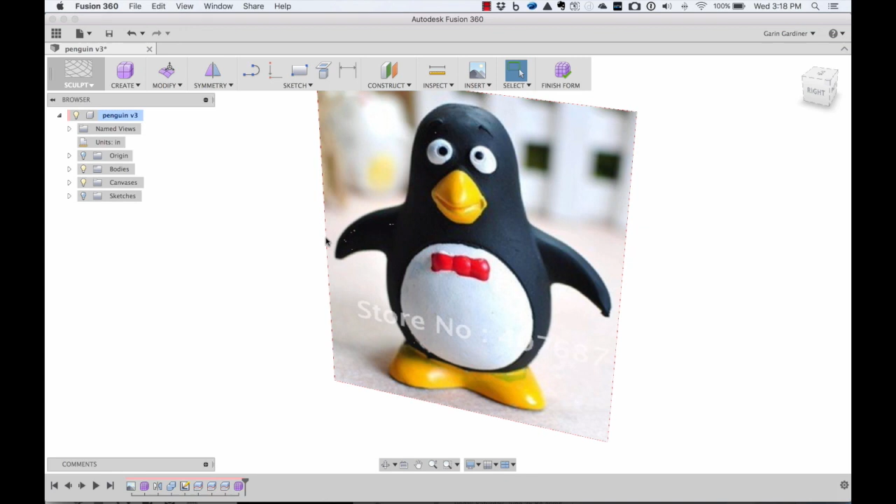So with that, let's turn those off and we'll turn that canvas back on. I just put a canvas in the background. And then our Sculpt environment is a great environment for this kind of stuff.

So I can create a box, and I'm just going to place a box down here kind of at the center, and we'll drag that up. With that, I'll just kind of eyeball a little bit about as high as I want it to be to start with. And I can also come in and put symmetry, so if I want it to have symmetry along some of these axes, I can do that.

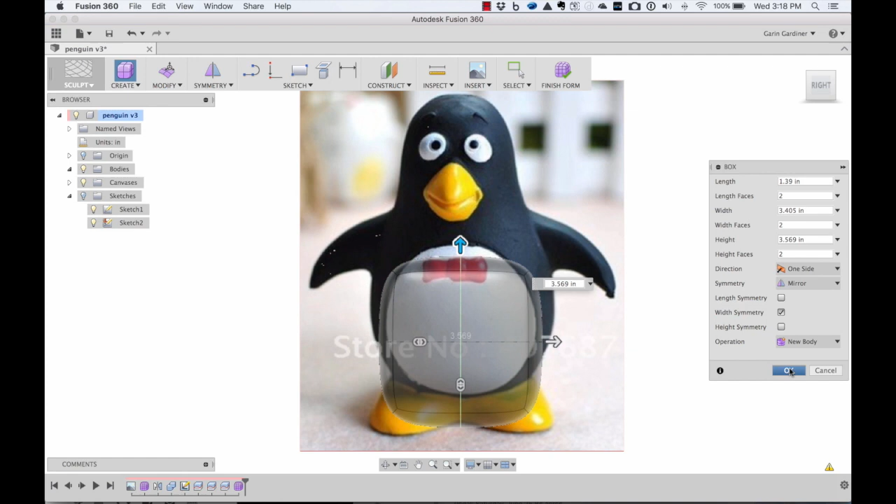Let's make sure that is fine. We'll just accept that so we can see I have the box there. If I turn off the canvas, we'll be able to see it solid, but the canvas just has the ability to kind of burn through my model a little bit.

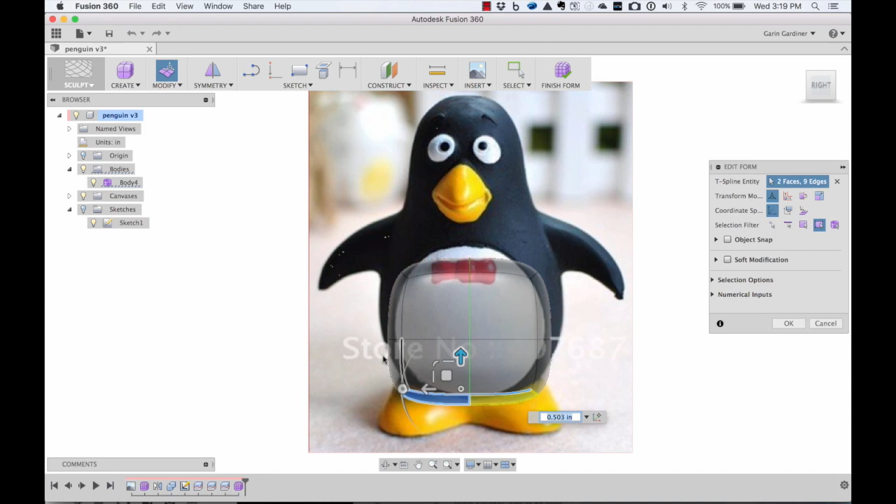So I'm going to grab that, and with my editing command, I can just come in here, pull that up a little bit. Maybe we'll pull that center up a little, pull those edges up a little bit. And I can start kind of scaling this in and out. So with that, we may say let's pull that in a little bit, maybe bulge that out a little, so we get something like that shape.

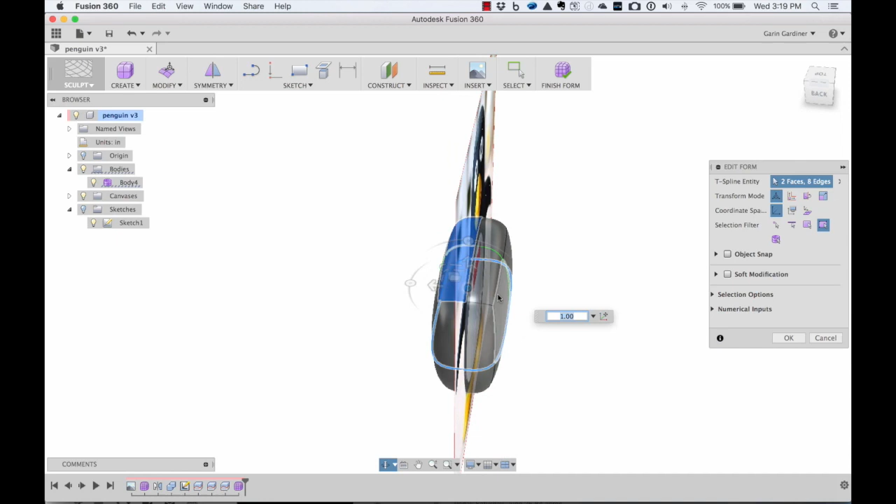We'll grab each of these faces, and you want to grab all four of them so that they don't split into individual faces when you extrude it up. Holding your Alt key, you can drag up and extrude and get extra faces.

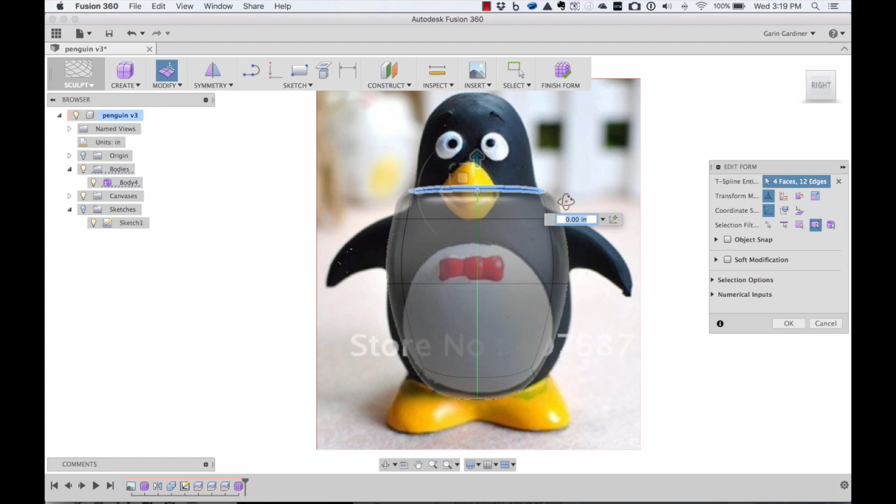So that'll be helpful so I can get those fins kind of in the place that I want them to be. We can probably pull that up a little bit. And with those selected, let's extrude those up one more time, and we'll bring those up.

Let me undo that just for a minute, make sure I just have faces and not edges, and pull that up. There we go. We'll go to the front view, scale that all the way down, kind of move it up. So you can see here pretty quickly we can grab shapes like this and kind of follow the contour of what I'm looking for.

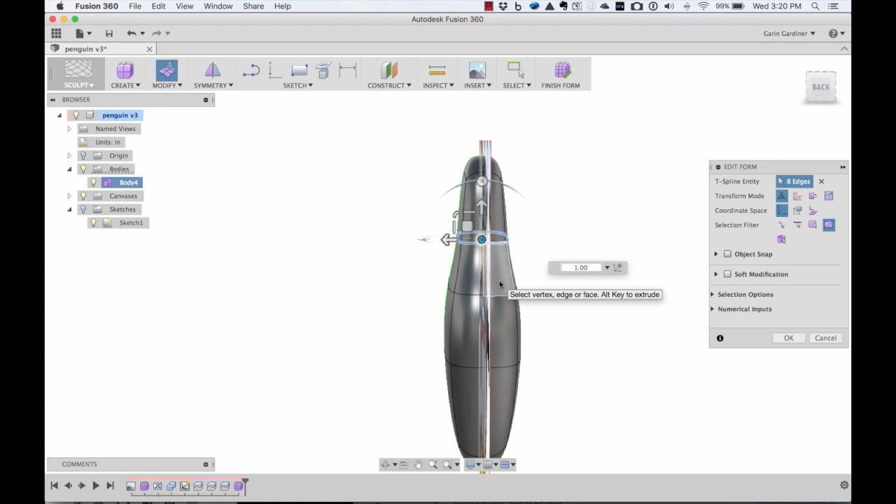It may be we want this to be a little bit fatter, so I'm going to grab the whole thing and just kind of scale out the whole shape. And the back of it maybe a little flatter than the front. We may want to put a tail in here.

I'm not going to worry too much about that yet. But I can grab all of these and just do a scale in if I want. It'll kind of flatten it a little bit. So we have kind of the shape that we're looking for there.

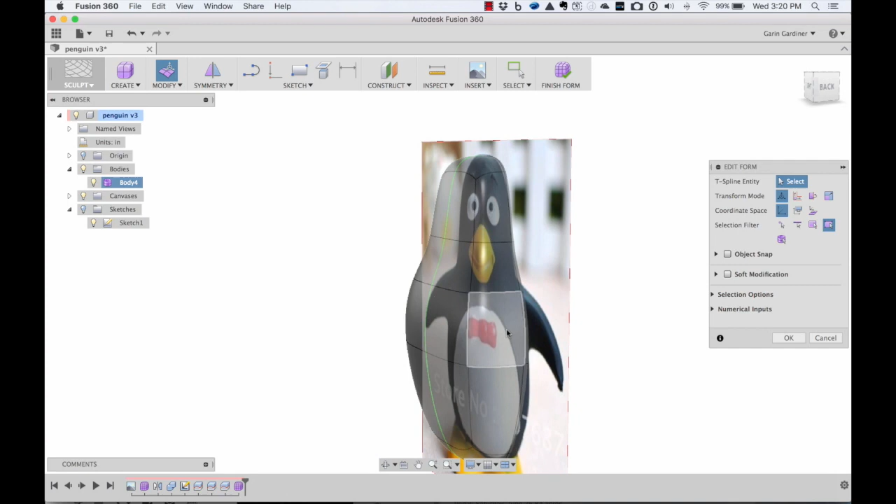We may even want to, let's just grab that back face, and looking at the side here, I'm going to drag that out. So we'll do an extrude. Now I didn't have an exact, I wanted the fins to be out a little bit.

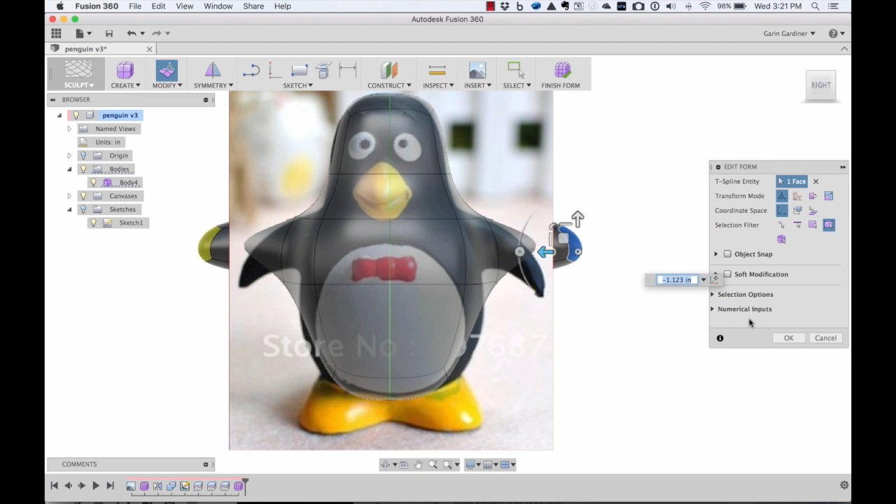There we go. So let's turn off the canvas now. So I have something like that. And let's pull that maybe in a little bit more, and we'll extrude it a couple of times. So we have that face, and I'm just going to hold the Alt key once again and drag that out just a few times. There we go.

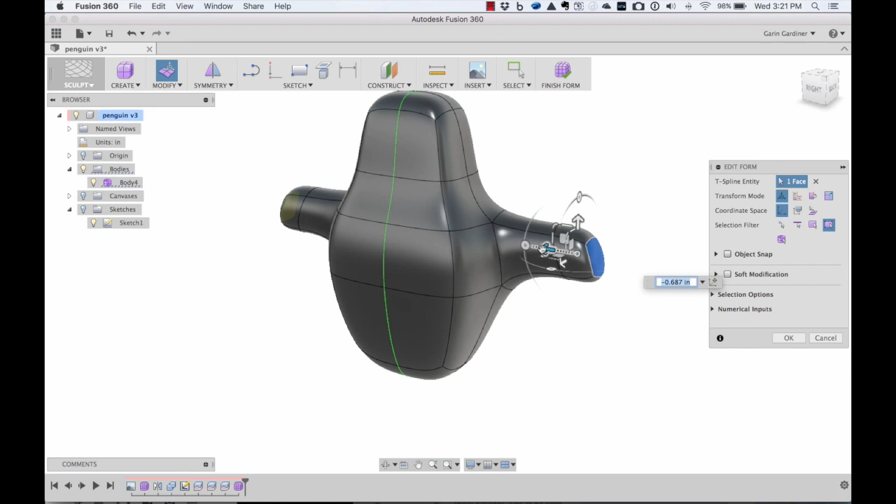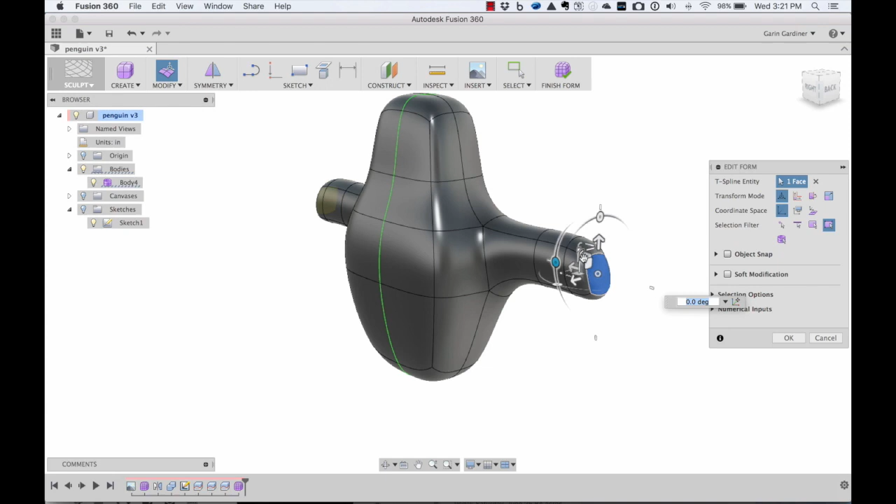Maybe three times. And then that allows me to kind of follow a contour, see how I want that to look. Maybe we rotate that a little bit, move it up. This one, we'll just double click on that edge. We may move it up, rotate it around a little bit. This end one, we may just want to scale that in, be a little bit flatter, and pull it down.

And maybe out a little bit, so you can just play around, kind of figure out what shape you want this thing to have. It may be that we want that to come in something like that a little bit. So we have the basic shape of our penguin.

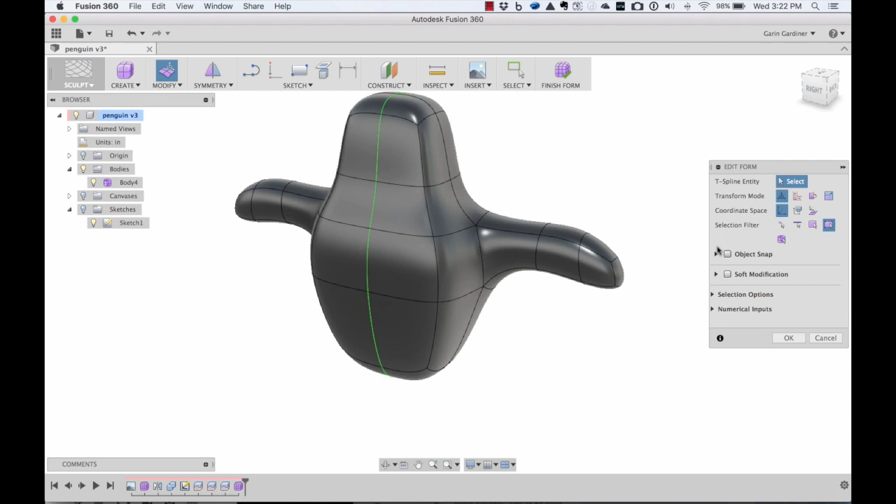From here, if I return out, it's now a solid body. I can do a number of things with it, like go back into the sculpt environment. If I wanted a foot here, I may just want to drag out something like that as a foot, pull it up a little bit, and let's just hit OK.

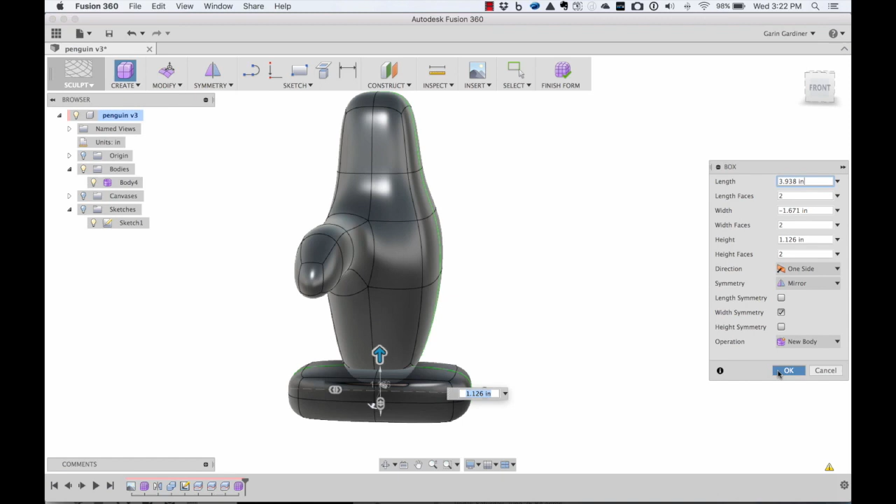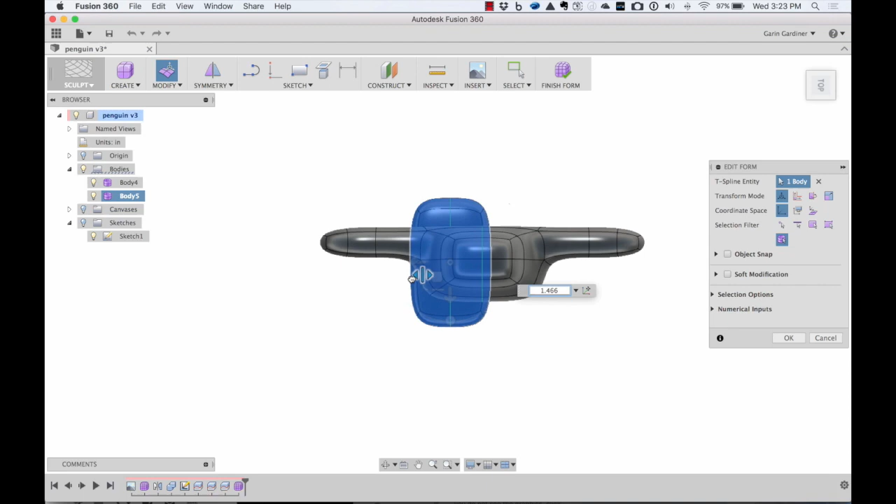To make something like a foot here, I want all these edges to be sharp. So I can just select them all, right click, and hit that we want to crease those, so we have a nice flat edge. And we may go to the front of that, grab the whole thing, and maybe we want it to be a little fatter, maybe a little narrower, so we'll scale it in a little bit.

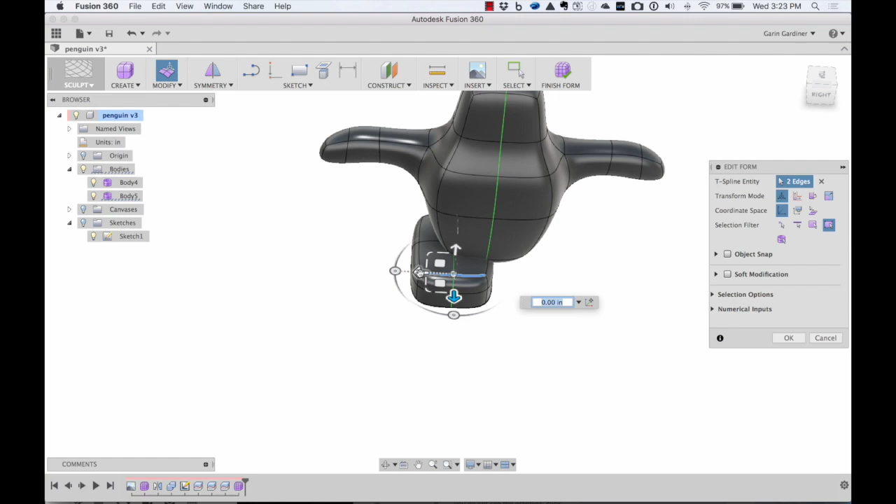It may be that if we go to just let's grab, you can see here we can choose. Right now it's looking at body. We can have all control, so I can grab everything, and we may want to scale that in a little bit there.

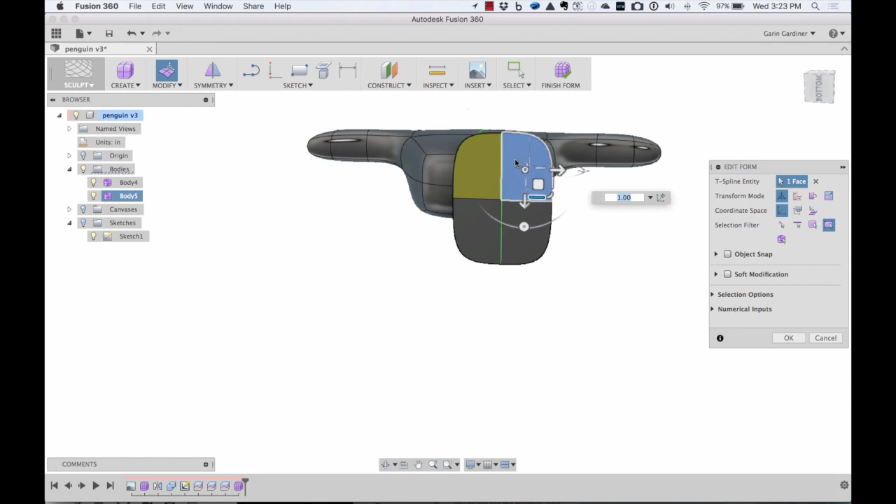I'm just going to undo that and grab all those edges all the way around. We'll scale those in just a little bit so it gives us some contour on here. And then we may want the entire foot to be kind of narrower, so we'll just scale that in.

We may want the back to be wider than the front, so we could grab those faces, kind of scale those out. We're just kind of playing around with this, seeing something we want. That looks pretty blocky. It may be that we want those to be a little narrower.

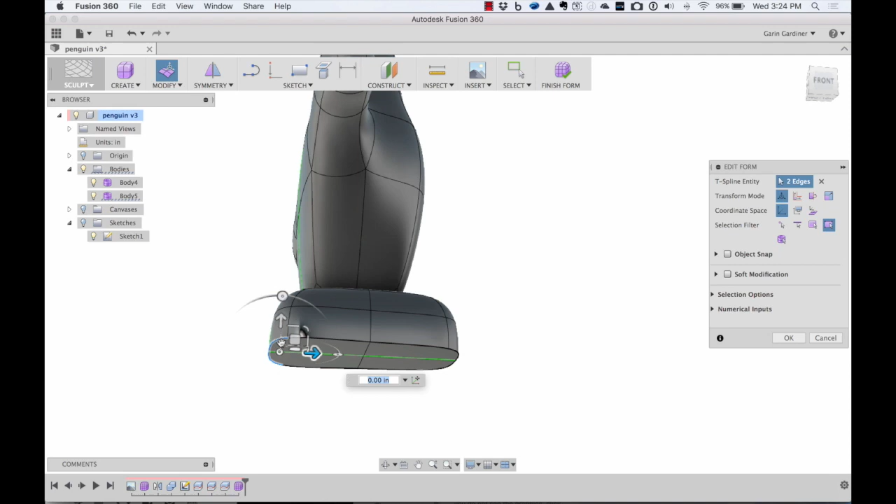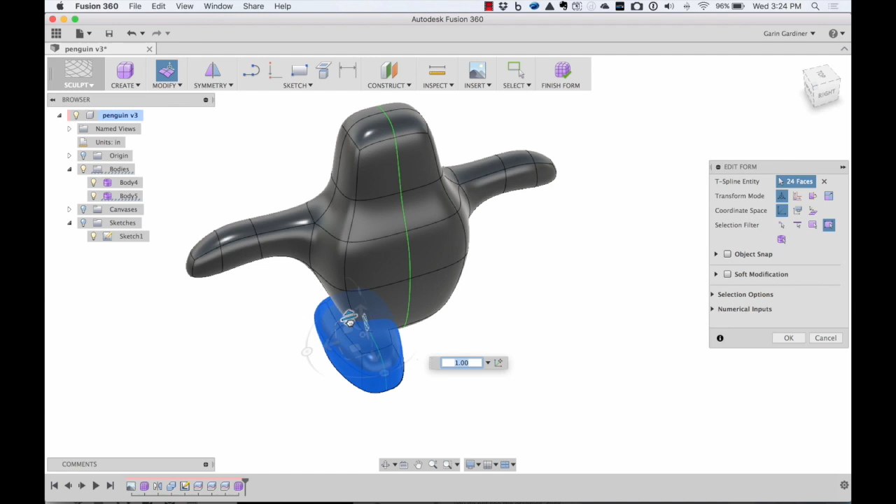And this to be a little fatter, so you can kind of control what that might look like. As you come in and play around a little bit and figure out the shape that you want, maybe the whole thing needs to be a bit flatter, maybe it's too fat, so you get something like that. And so we'll use that as one of the feet.

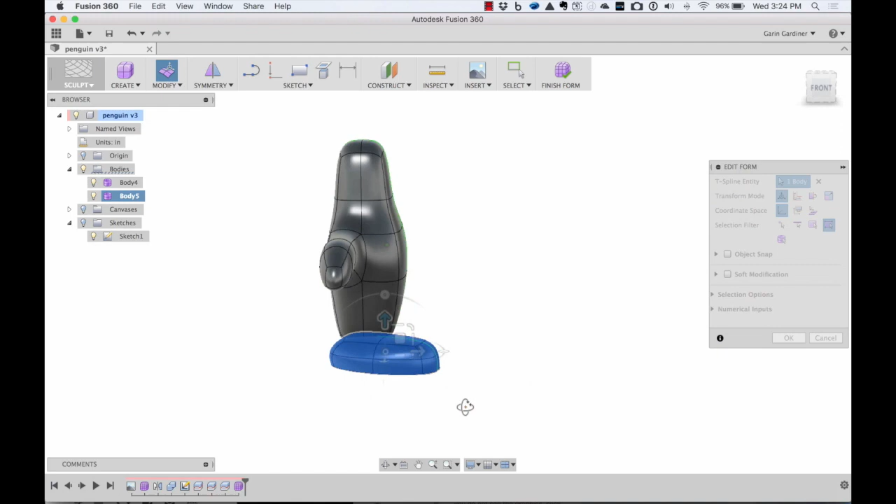I'm going to position it where we want it, so we'll just grab the whole thing and rotate it a little bit so we get something like that. And in the front, we want to pull it up into the model a ways. We'll see what that will look like in a minute. Not quite, it looks a little big.

We probably want to scale the entire thing down, so we can just go to the center, scale the whole thing down. I want it to be a little exaggerated, but not too exaggerated. So with something like that, when I return out, you'll notice that I have a couple of different bodies for that.

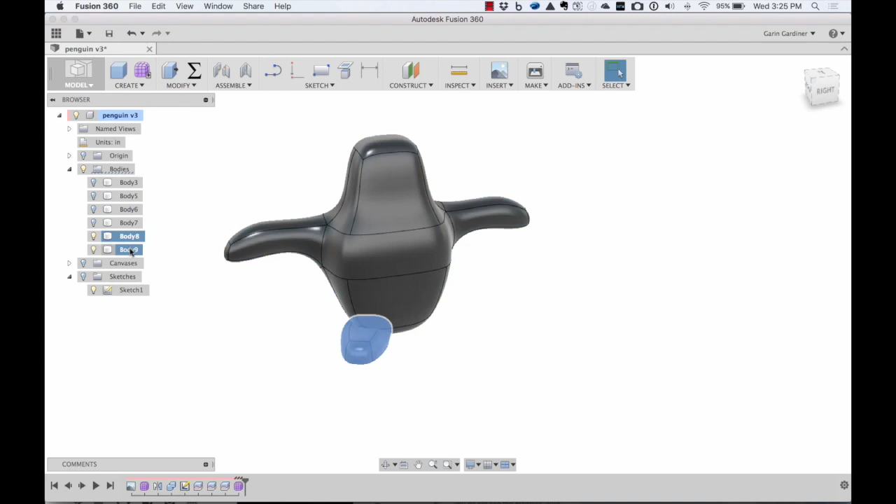And I can also come in and say, let's just mirror. And I can tell it to mirror that body. And I probably don't have a plane where I want, but let's see if that's in the middle. Looks like it's pretty close. So I've mirrored that over, and now I have both sides.

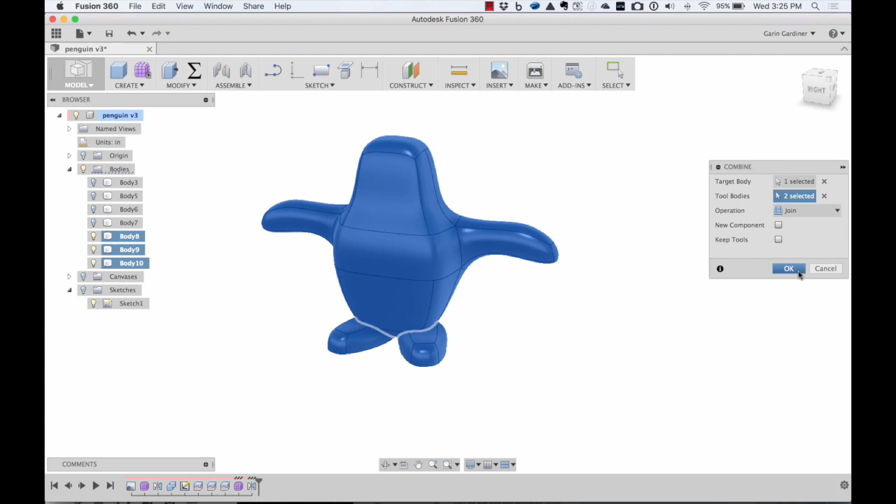And then what I did to join all these together, because ideally I'd do much the same on the beak, I would come in and say let's combine these three parts. So now it's one body for all of it.

So now when I export this, which I'm going to want to export as an STL file, I can come in and say let's just do an export. I can just right click on that body, save it as an STL. I don't want to send it to a printer, so if I hit OK here, it's going to ask me where I want to save it. So I can give it a name, save it to my desktop or wherever, and save it as an STL.

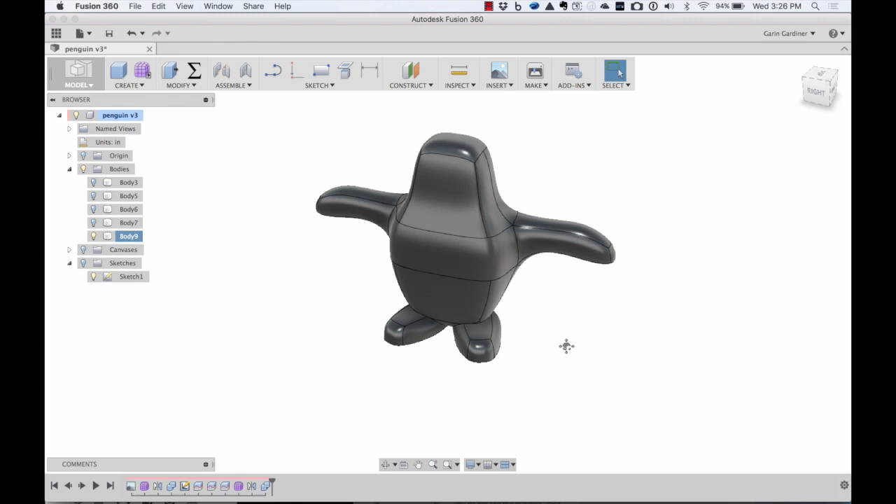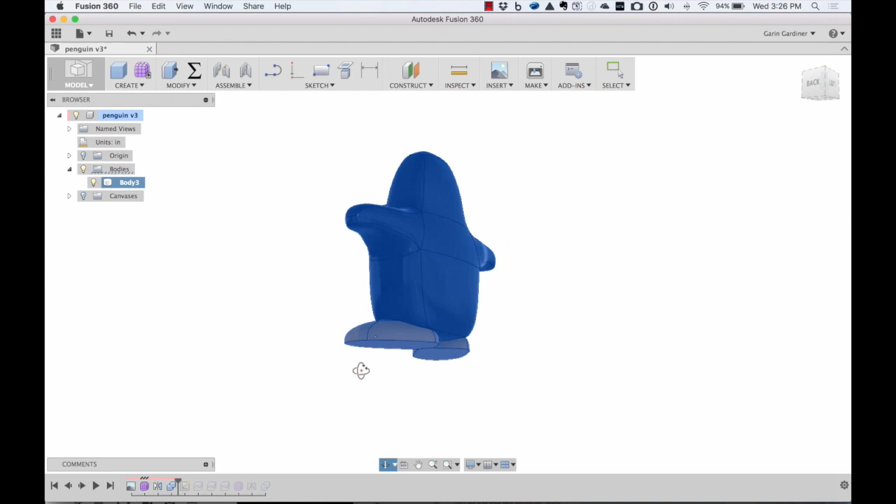So now I have something like this STL out, and I've done something very similar with this guy. I modeled him up, I exported, and I have a couple of extra bodies here because I split it to show some colors. But if I roll this all the way back, I have basically one body of the original one I created, and I've exported that as an STL file that I can bring right into 123D Make and be able to slice and dice this into different pieces.

So hopefully that helps on creating this in Fusion 360 for the first step.